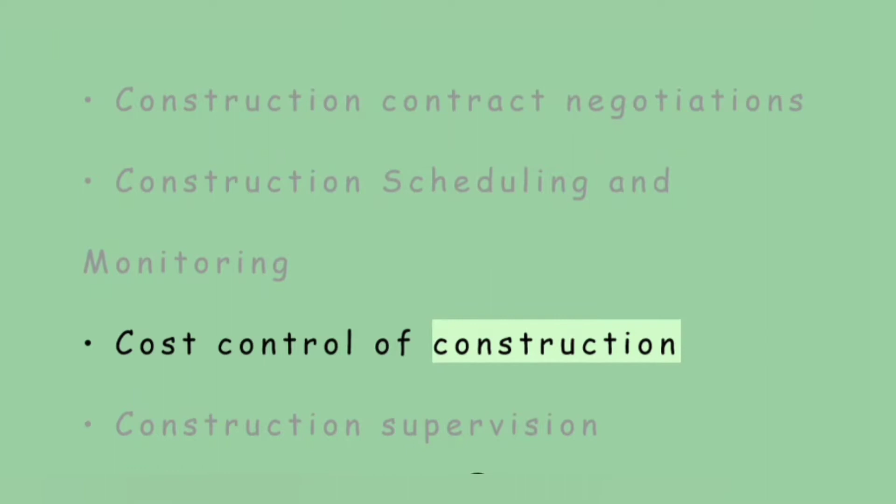What are the responsibilities of a construction manager? The responsibilities of a construction manager are cost estimates, pre-purchase of selected materials, selection of bidders for bidding phase, analysis of proposals, construction contract negotiations, construction scheduling and monitoring, cost control of construction, and construction supervision.

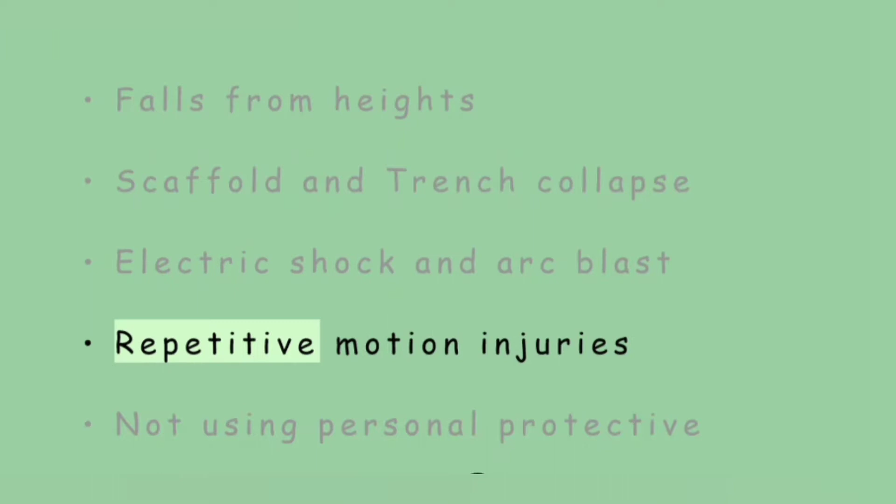List out the potential risk factors for workers on the construction site. These include falls from heights, scaffold and trench collapse, electric shock and arc blast, repetitive motion injuries, and not using personal protective equipment correctly.

What is OSHA compliance? OSHA stands for Occupational Safety and Health Act. Its motive is to fulfill the health and safety requirement of employees and workers. It is a standard for health and safety that is followed by every industrial segment and corporate offices throughout the USA.

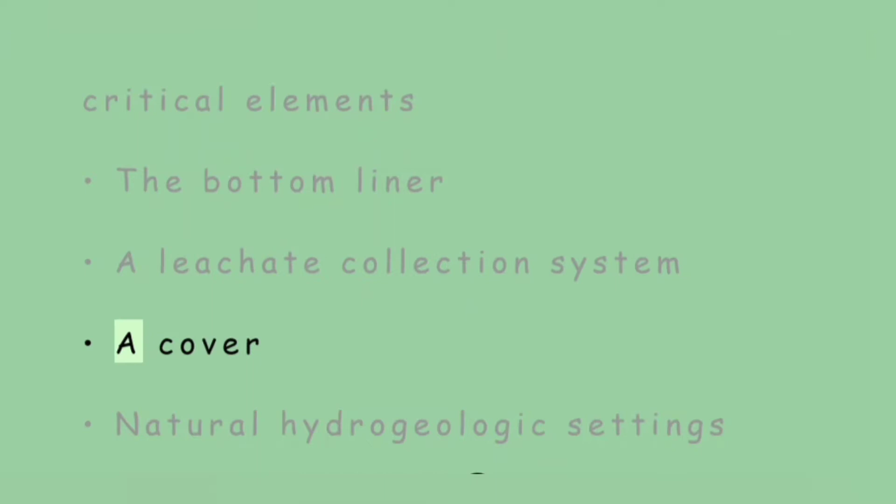Mention what are the composition of a landfill. For a secure landfill, there are four critical elements: the bottom liner, a leachate collection system, a cover, and natural hydrogeologic settings.

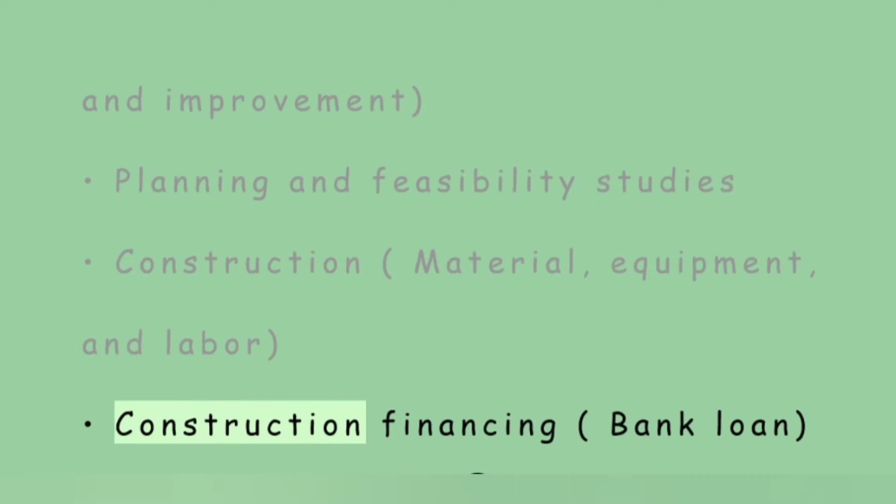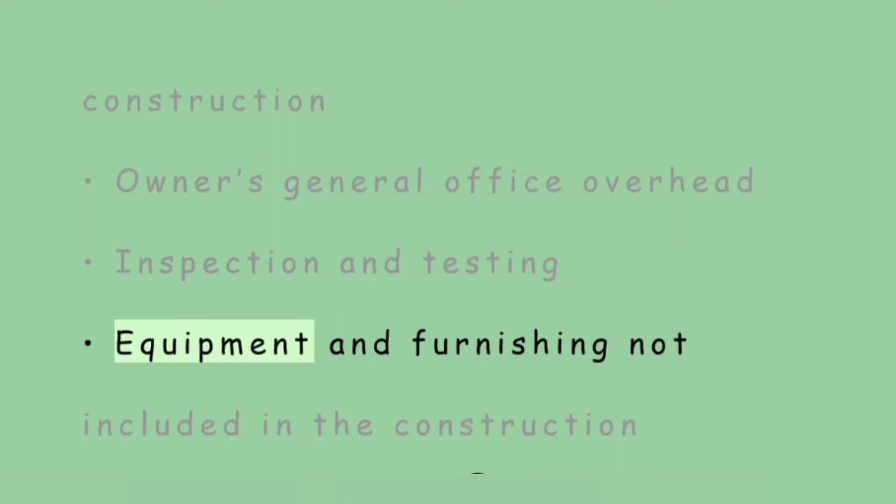For the construction project, what capital cost has to be taken into consideration? Land acquisition, assembly, holding and improvement; planning and feasibility studies; construction material, equipment and labor; construction financing and bank loans; insurance and taxes during construction; owner's general office overhead; inspection and testing; equipment and furnishing not included in the construction; and field supervision, architectural and engineering design.

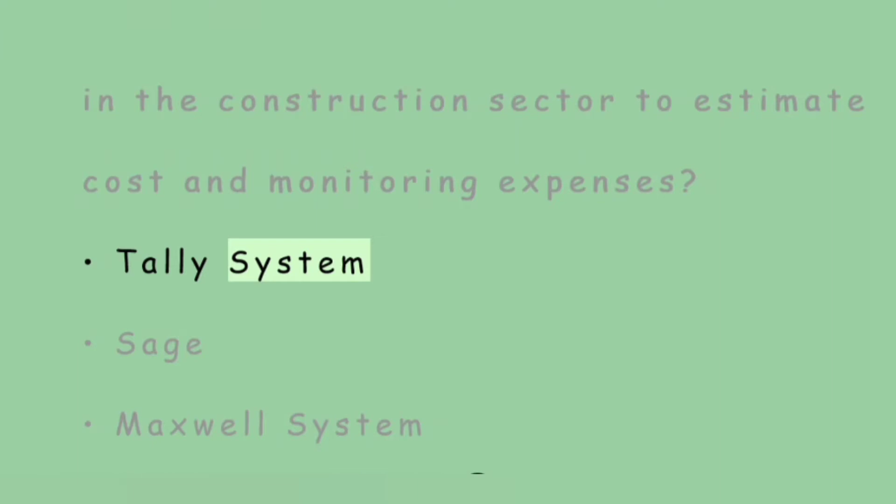List out some of the software used in the construction sector to estimate cost and monitor expenses: Tally System, Sage, Maxwell System, Premier Construction Software, Takeoff, Construction Partner, etc.

What is reinforced concrete? Reinforced concrete has steel bars or mesh in them, which gives extra strength to the construction.

What are the different types of foundation? Three main types of foundation are: basement, in which a basement is prepared first and the building is constructed on top of it; crawl space, a raised foundation built above the ground allowing just enough space to crawl underneath; and slab, in which concrete is directly poured into the pit made in the ground.

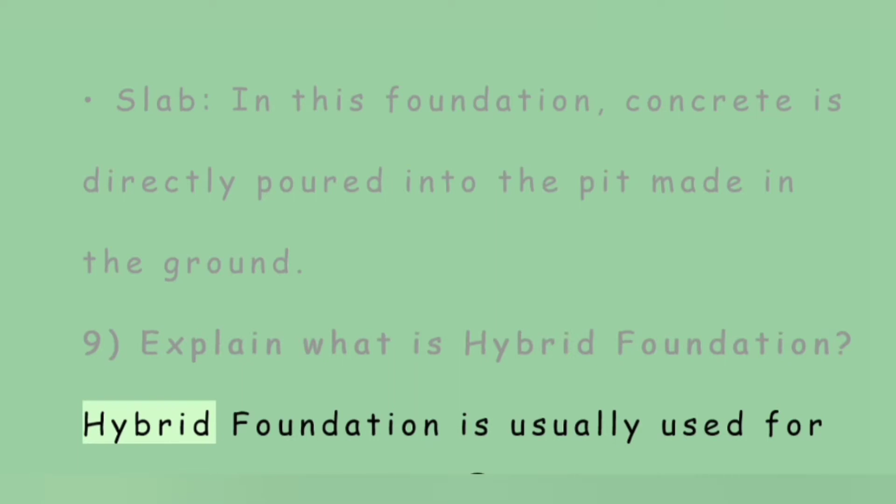Explain what is hybrid foundation. Hybrid foundation is usually used for high-rise buildings. It contains both soil-supported mat and piles. This type of foundation is helpful in reducing the amount of settlement.

What are the common ways of demolition? Hydrodemolition, pressure bursting, and dismantling. Explain what is floating slab foundation.

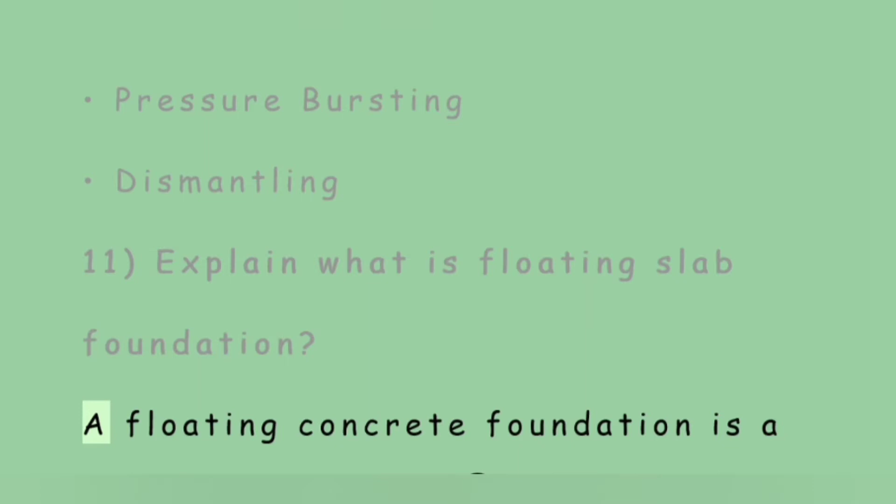A floating concrete foundation is a type of mat foundation that consists of a hollow mat formed by a grid of thick reinforced concrete walls between two thick reinforced concrete slabs.

Explain what is flashing. Flashing is an extended construction that is done to seal and protect joints in a building from water penetration. Flashing is installed at the intersecting roofs, walls and parapets.

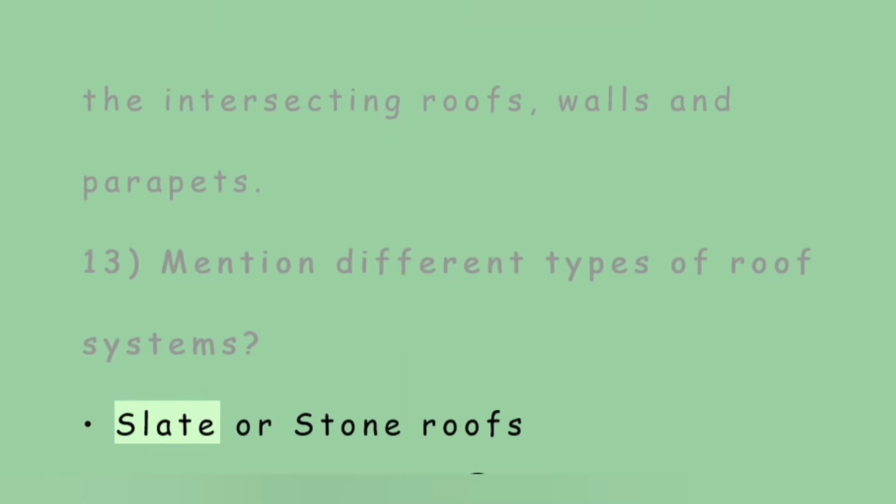Mention different types of roof systems: slate or stone roofs, wood shingle roofs, and metal roofing systems.

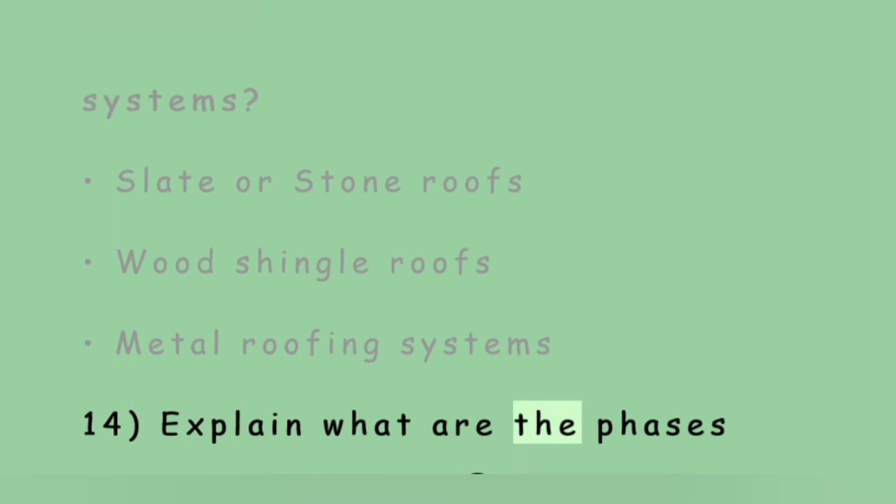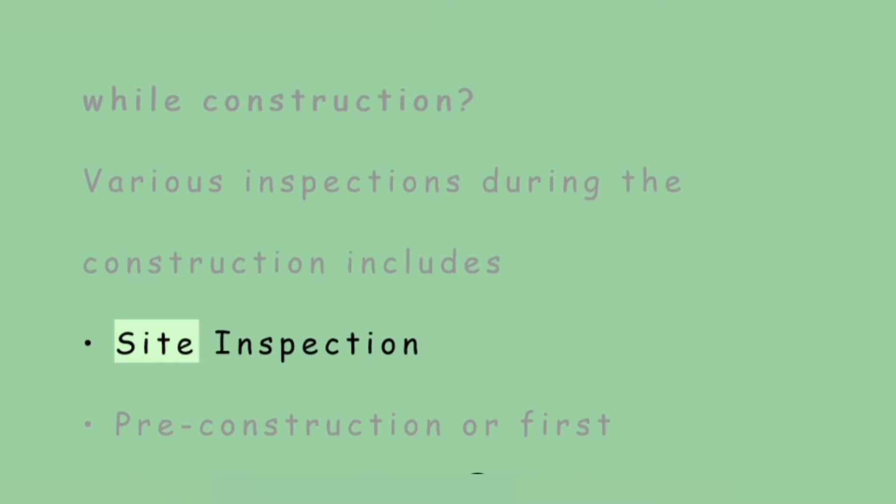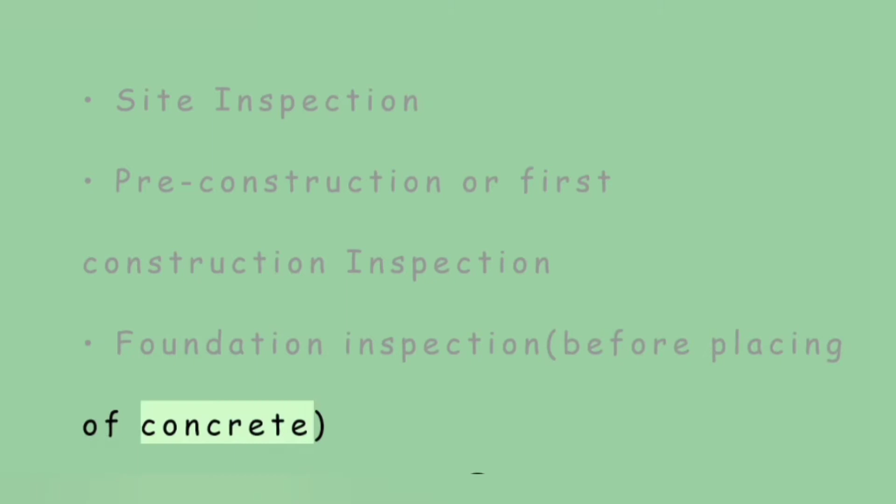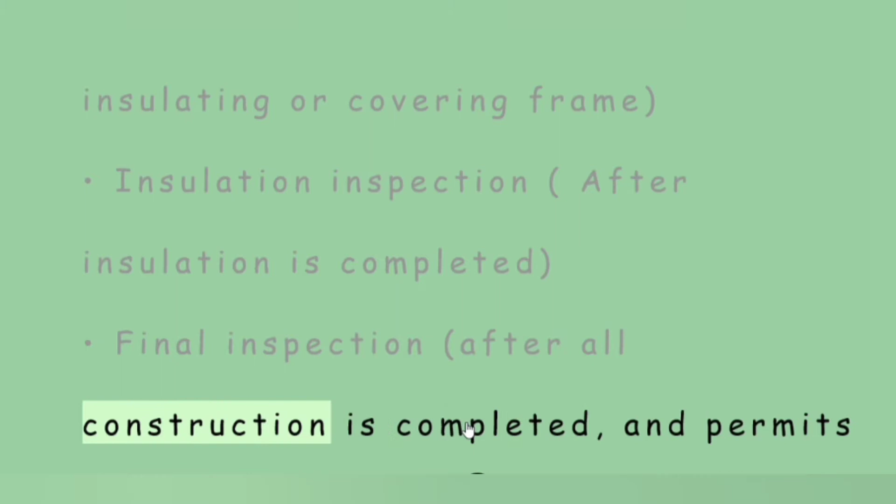Explain what are the phases of inspections done by local authority while construction. Various inspections during construction include site inspection, pre-construction or first construction inspection, foundation inspection before placing of concrete, framing inspection before insulating or covering frame, insulation inspection after insulation is completed, and final inspection after all construction is completed and permits are received.

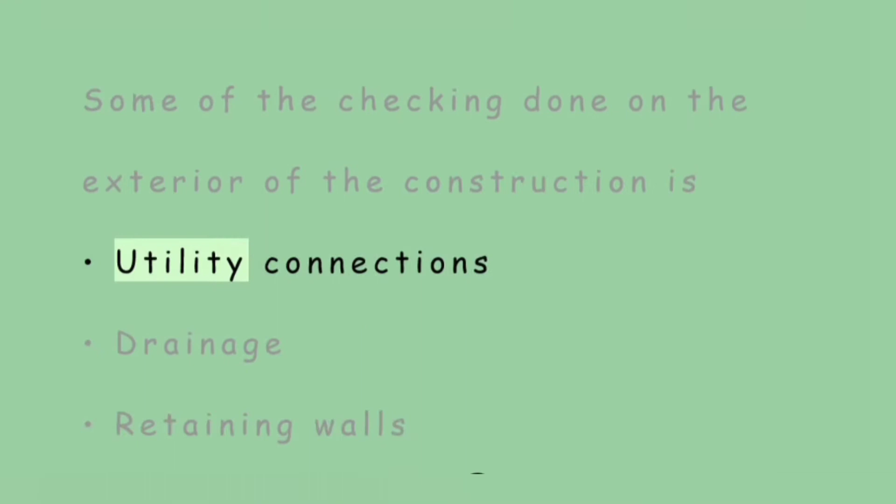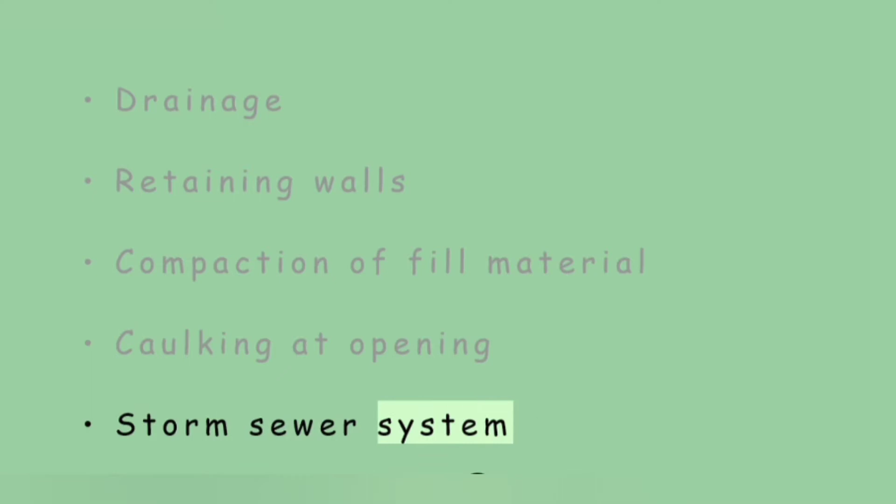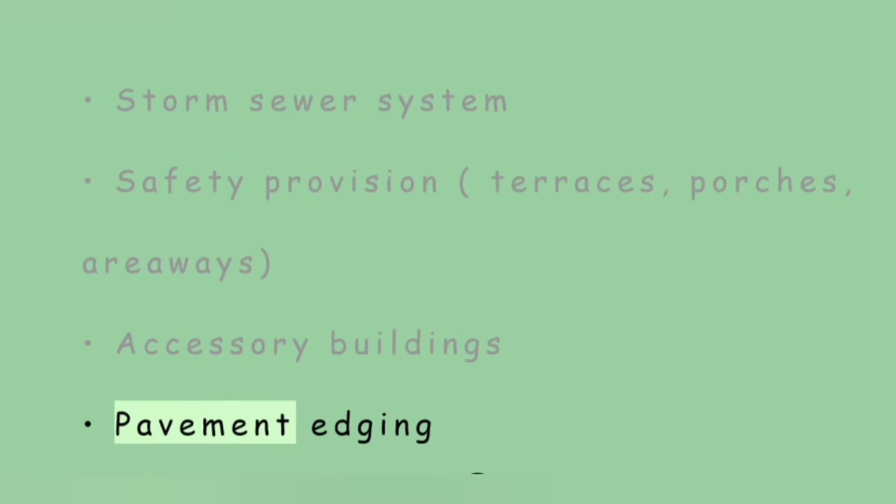List out some of the checkings done at the completion of construction. Some of the checking done on the exterior of the construction includes utility connections, drainage, retaining walls, compaction of fill material, caulking at openings, storm sewer system, safety provision, terraces, porches, areaways, accessory buildings, pavement edging, protection against moisture penetration, and design of dwelling structure.

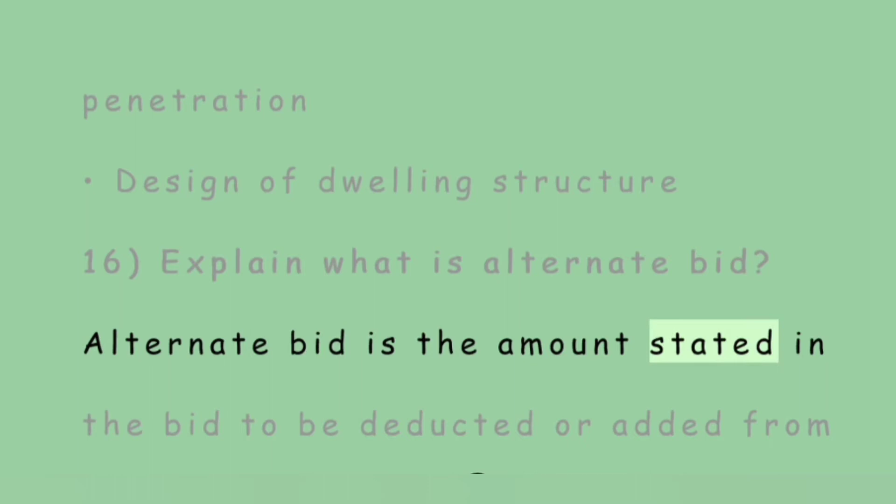Explain what is alternate bid. Alternate bid is the amount stated in the bid to be deducted or added from the base bid amount. Alternate bid is proposed when there is a use of alternate materials or methods of construction.

Explain what is change order request. Change order request is a written document issued or given by the owner requesting an adjustment to the contract sum or an extension of the contract time. Usually, it is issued by the architect or owner's representative.

What does construction cost cover and what does not? A construction cost covers material, labor, equipment and services, contractors' overhead and profit, and other direct construction costs. While it does not cover compensation paid to the architect, consultant or engineers, cost of the land and other costs.

Explain what is critical path method, C.P.M. Critical path method is a strategy and method of representing the respective tasks and activities involved in the construction through a symbolic diagram. What is demising walls?

Demising wall is used for the boundary that separates your land or house from neighbor's house.

What is labor and material payment bond? It is a bond between the owner and the main contractor, where a contractor guarantees payment to the owner if he fails to pay for all labor, materials, equipments or services in accordance with the contract.

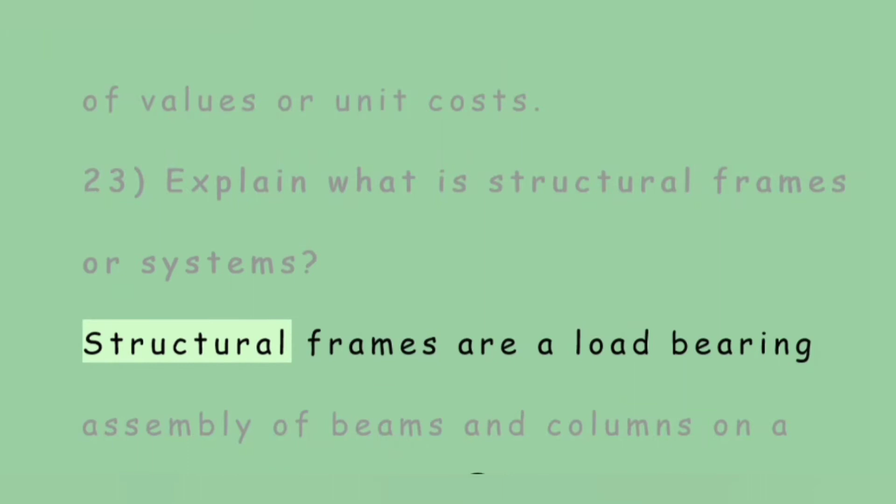Explain what is structural frames or systems. Structural frames are a load-bearing assembly of beams and columns on a foundation. Normally, the columns and beams are generally fabricated off-site and assembled on-site.

Explain what is zoning permit. Zoning permit is a document issued by governing urban authority permitting land to be used for a particular purpose.

Explain what is the release of lien. Release of lien is a written document executed by an individual or firm supplying labor, material or professional service on a project, which releases his mechanic's lien against the project property.

What is architect prepared contract? Architect prepared contract is an agreement prepared in-house by the architect between owner and architect, and often it is not a legal contract, and it does not include all terms and conditions including adequate legal protection for both the parties.

Explain what 1/8 on the architect ruler denotes. 1/8 on the ruler is in fact a scale that converts 1/8 inch on the drawing to 1 foot. It would represent a drawing with a scale of 1/8 equal to 1 foot.

List out some of the software programs that can be useful for architects: AutoCAD, Revit, 3ds Max, SketchUp, Photoshop, Adobe Creative Suites, Microsoft Office, Digital Media.

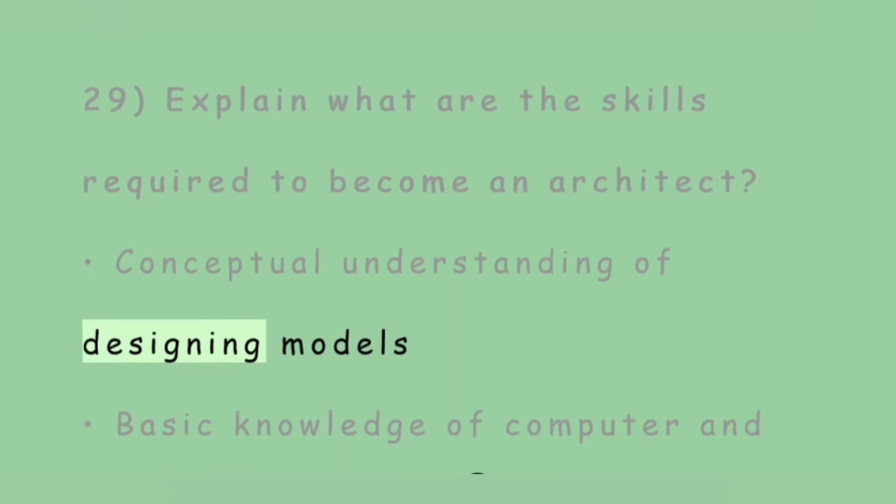Explain what are the skills required to become an architect: Conceptual understanding of designing models, basic knowledge of computer and architect-related software programs, engineering ability, business aptitude, legal knowledge, designing 3D models.

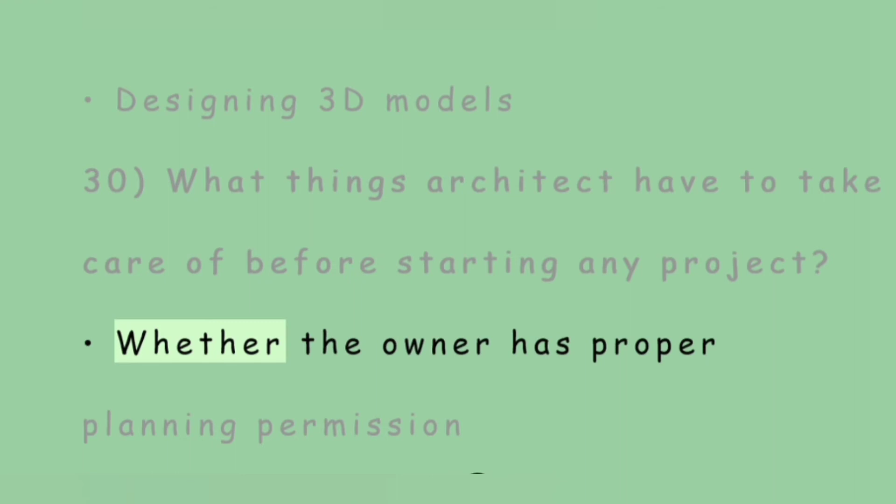What things does an architect have to take care of before starting any project? Whether the owner has proper planning permission, whether the building has a certain listed grade approved, knowledge of building appliances and materials that includes the cost as well, and the need to take environmental factors into consideration.

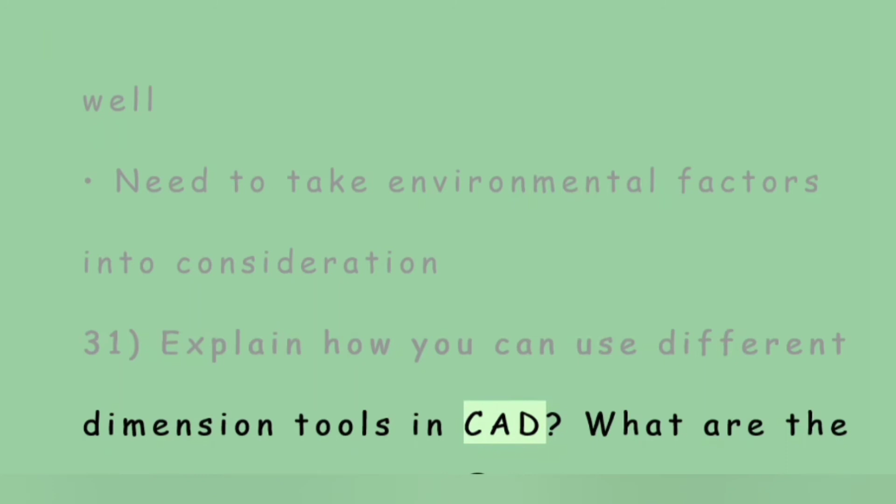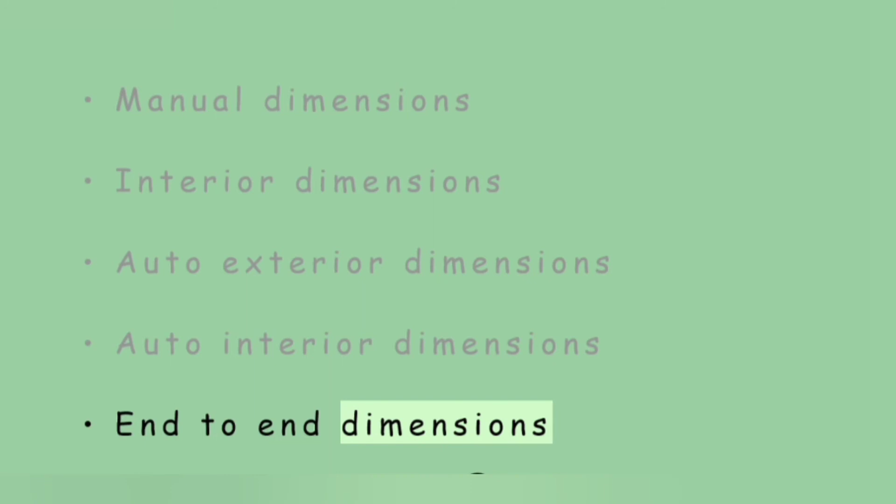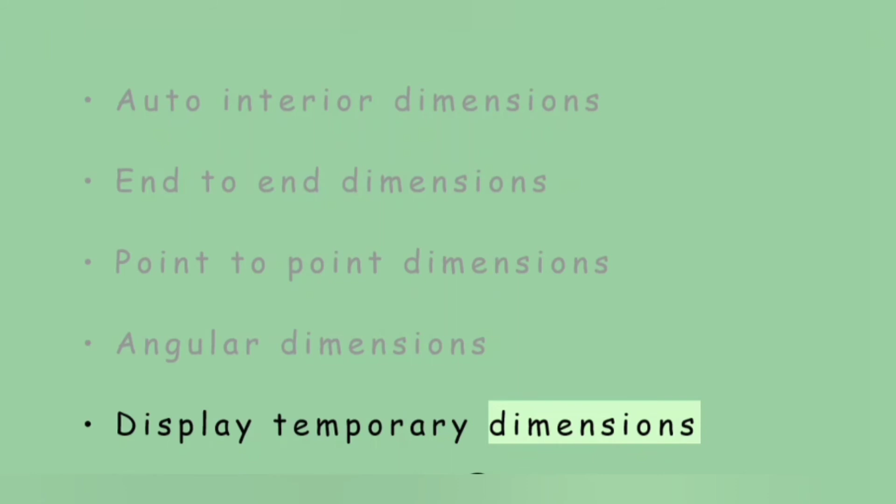Explain how you can use different dimension tools in CAD. What are the different dimensions available? If you are using CAD and want to use dimension tools, go to CAD Dimensions and you can access a wide range of dimensions like manual dimensions, interior dimensions, auto exterior dimensions, auto interior dimensions, end-to-end dimensions, point-to-point dimensions, angular dimensions, display temporary dimensions, and moving objects using dimensions.

Explain how you can turn off the display for dimensions in CAD. The display of your dimensions can be turned off in CAD. For that, go under Floor Plan View and follow these steps: in Floor Plan Active, select Tools Display Options, scroll down to the Dimensions Automatic and Dimensions Manual layers, and remove the check marks from the Disp column. When you click OK, the display of the dimensions in your plan will be turned off.

Which are the top apps for a civil engineer? Some of the best apps: Evernote, Skitch, Dropbox, Instagram, Sketchbook, Photoshop Express, Flipboard, Magic Plan, Houzz, AutoCAD WS.

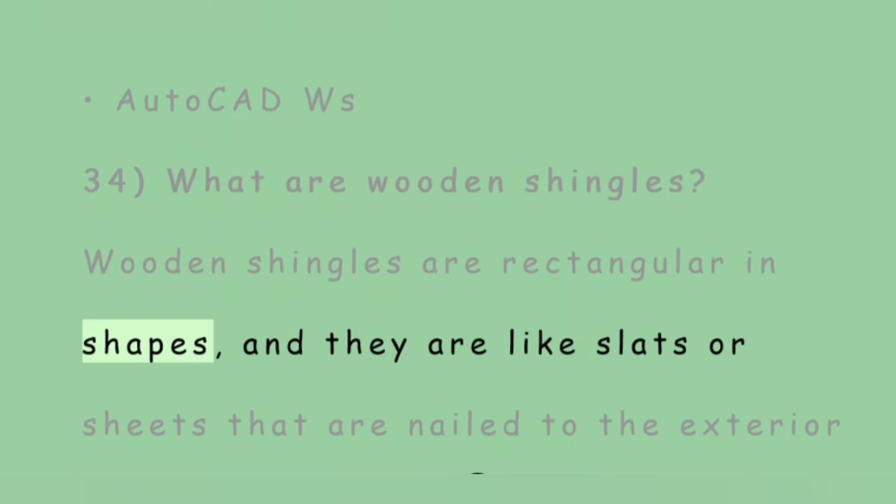What are wooden shingles? Wooden shingles are rectangular in shape, like slats or sheets that are nailed on. Shingling is a traditional weatherproofing method for buildings.

List out some of the common problems architects have to tackle: times when the client is not sure what they want, times when there is a limited budget, times when the customer requires a custom design at standard design cost, and times when the architect has to work with limited space.

How to build a floor-to-ceiling bookcase: first measure the distance between the floor and ceiling, cut two boards to the length of that distance, cut two boards to the width you require, then attach the top and bottom boards to the side boards with 2-inch nails, keeping a gap of about 1 or 2 inches between each nail.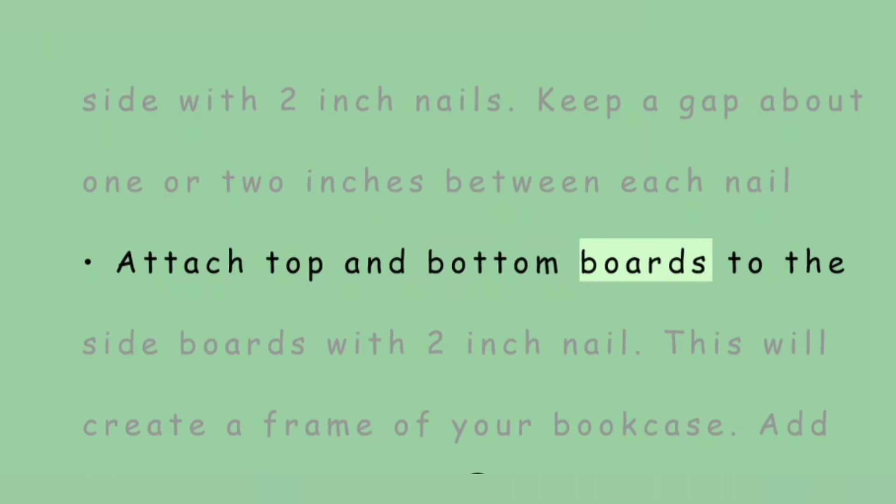Attach the top and bottom boards to the side boards with 2-inch nails. This will create the frame of your bookcase. Add the shelves to the bookcase the way you want, and then paint it.

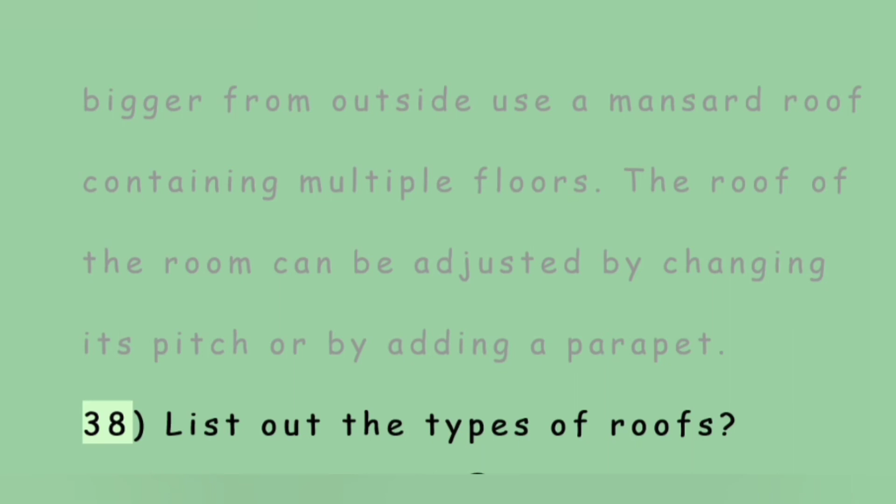List out the types of roofs: half-hipped roof, Dutch gable roof, skillion roof, gambrel roof, gull-winged roof, mansard roof, bell-cast roof, sawtooth roof, monitor roof, etc.

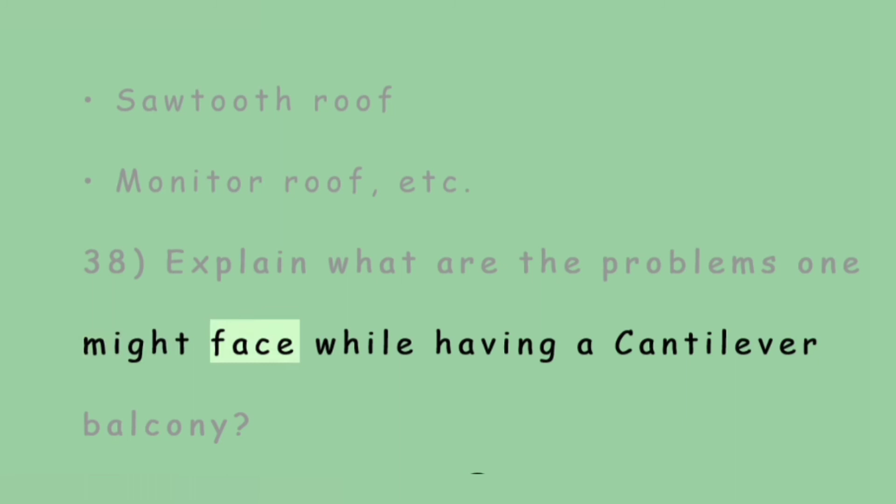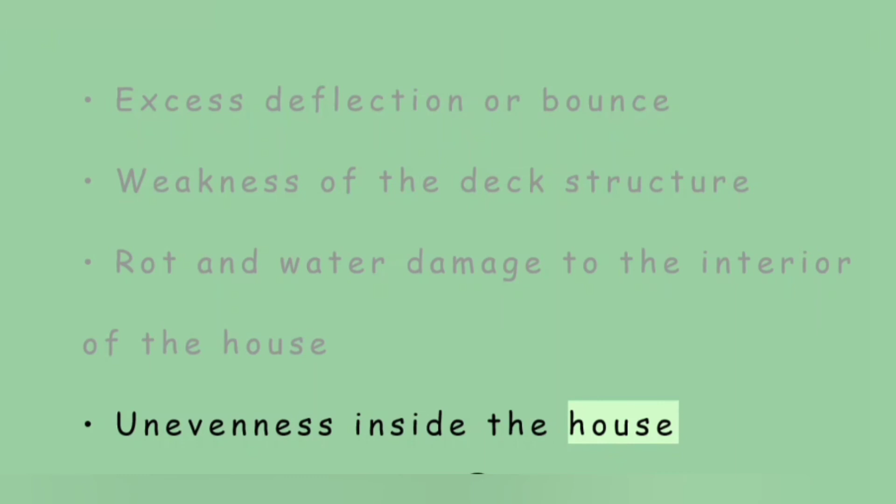Explain what problems one might face with a cantilever balcony. Cantilever balconies are usually unsupported and extend outwards, so the problems include excess deflection or bounce, weakness of the deck structure, rot and water damage to the interior of the house, unevenness inside the house, and the inability to use the balcony for gardening or other purposes, as it is not designed to lift an excess amount of weight.

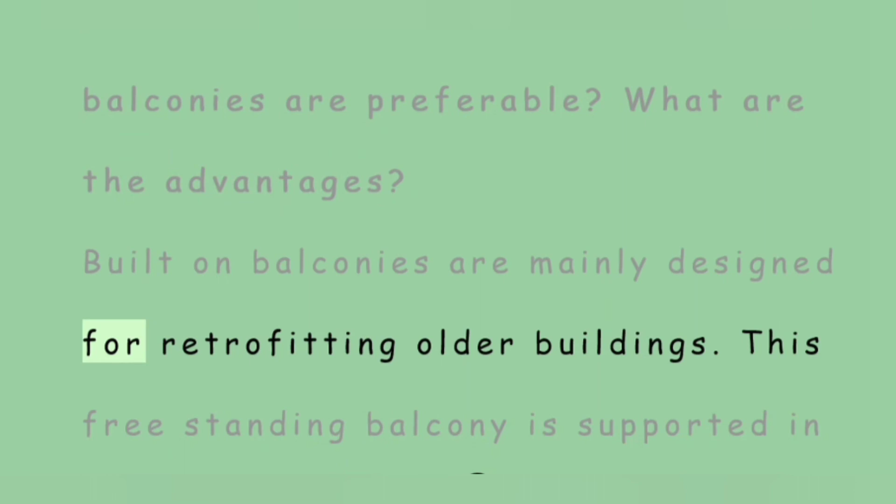For what buildings are built-on balconies preferable, and what are the advantages? Built-on balconies are mainly designed for retrofitting older buildings. This freestanding balcony is supported in front of the facade on 4 columns and is backed to the wall with brackets.

The advantages of built-on balconies: old balconies can be dismantled and new ones erected immediately in front of the facade without disturbing the inner structure of the building. The work takes place outside the house, so there is no interference to the interior of the building.

What things do you need to take care of before building a kitchen island? Design the kitchen island according to the need—if it's only for cooking, use less space, but if it's also for eating, design it accordingly. List out what appliances you need for your kitchen island.

Consider how high the counter should be, how much storage space you require, and ensure the working sides surrounding the kitchen island have a minimum of 42 inches of space around it. Don't plan a kitchen island if it makes your kitchen more congested.

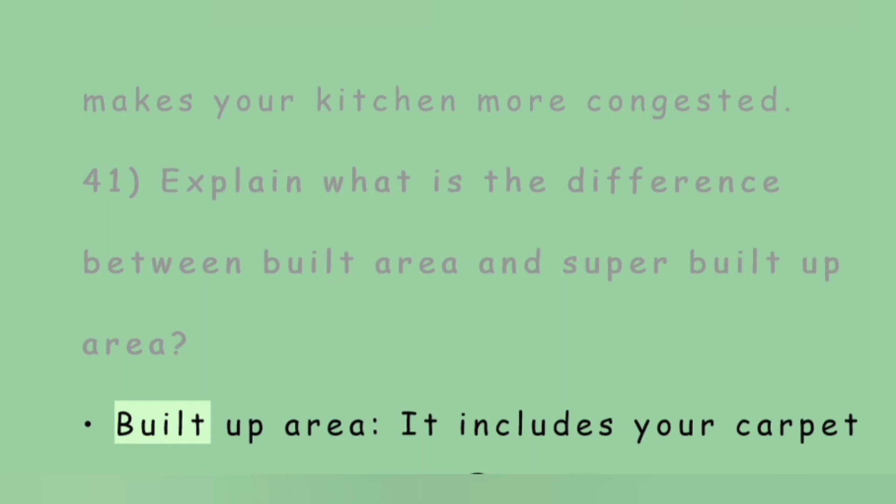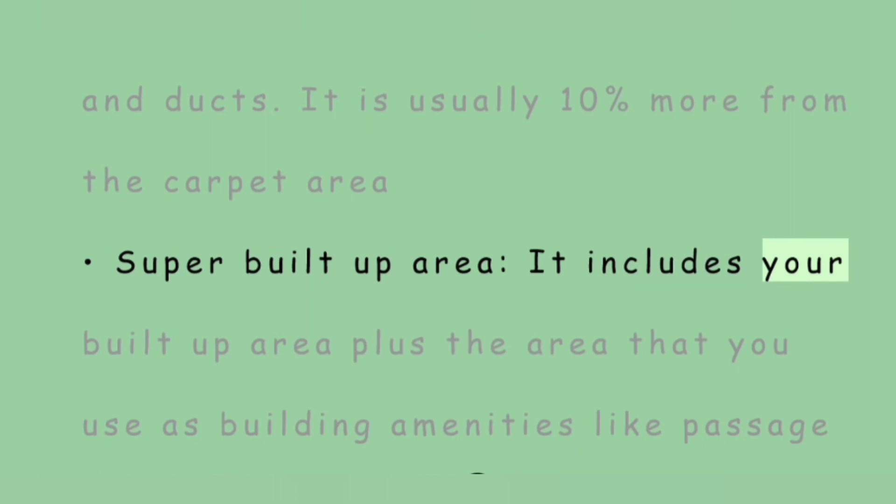Explain the difference between built-up area and super built-up area. Built-up area includes your carpet area plus the area covered by walls, pillars and ducts, and is usually 10% more than the carpet area. Super built-up area includes your built-up area plus the area used for building amenities like passage to lift, stairs and lifts, gym, club, etc.

What is the ideal size of a living room? It ranges from small to large. A very small living room is 7 by 10 feet, for a 2-seater sofa on one side of the room. A small living room is 10 by 13 feet, for a 2-seater sofa. A medium living room is 12 by 18 feet, for a 3-seater sofa. A large living room is 15 by 20 feet, for a 4-seater or 5-seater sofa.